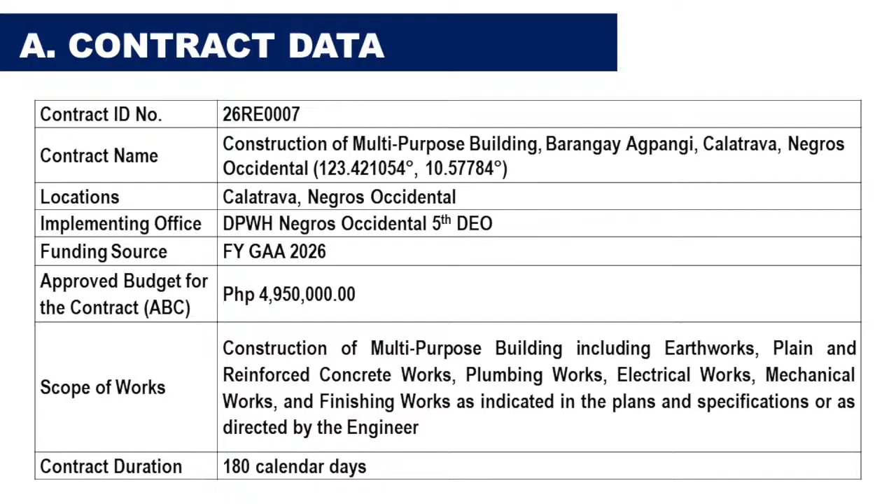For the requirements of our bidding documents, for the major category of works we have BICWO PLC, buildings construction without piles, low-rise concrete frame, 1 to 5 stories. For the similar categories of works: BICW PHCCP, buildings construction with piles, high-rise concrete frame, cast-in-place piles, and BICW PLCCP, buildings construction with piles, low-rise concrete frame, cast-in-place piles.

We also have BICW PHCDP, buildings construction with piles, high-rise concrete frame, driven piles. BICW PLCDP, buildings construction with piles, low-rise concrete frame, driven piles. BICWO PHC, buildings construction without piles, high-rise concrete frame. Then BIL, buildings industrial plant, low-rise. BIH, buildings industrial plant, high-rise. BIM, buildings industrial plant, medium-rise.

For the list of key personnel: 1 personnel each for project manager, project engineer, materials engineer, construction safety officer, and foreman. For the minimum number of years, we have 1 year for the project manager and foreman, and 3 years for the project manager and foreman under total work experience. For project engineer, materials engineer, and construction safety officer, no minimum years of experience is provided, provided that they are accredited project engineer and materials engineer and have completed COSH training or are accredited safety officers.

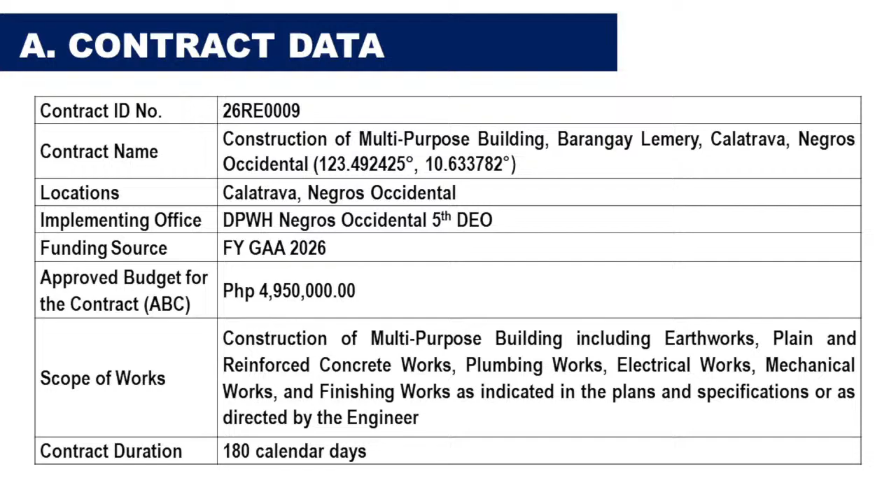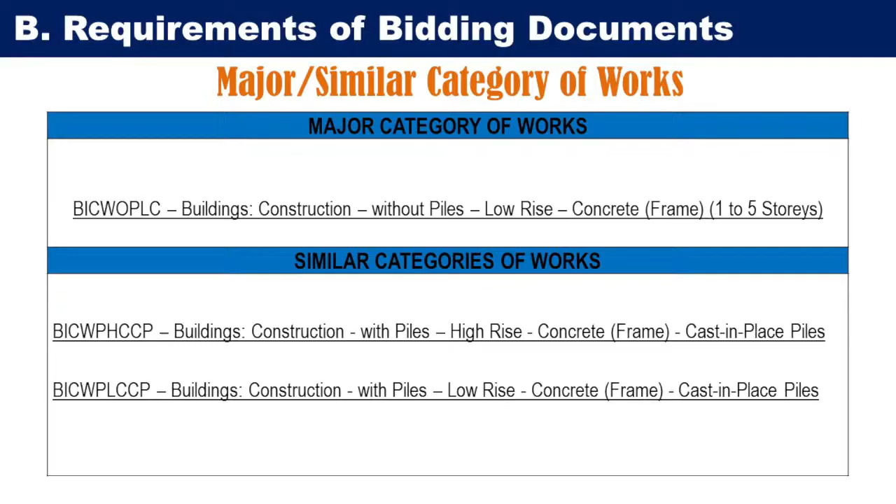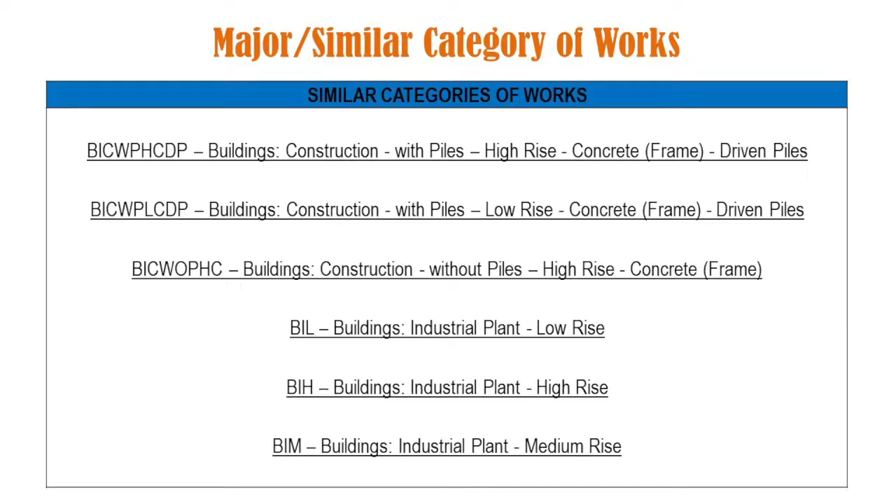For the requirements of bidding documents, major category of works: buildings construction without piles, low-rise concrete frame, 1 to 5 stories. Similar categories of work: buildings construction with piles, high-rise concrete frame, cast in place piles; buildings construction with piles, low-rise concrete frame, cast in place piles; buildings construction with piles, high-rise concrete frame, driven piles; buildings construction with piles, low-rise concrete frame, driven piles; buildings construction without piles, high-rise concrete frame; buildings industrial plant, low-rise; buildings industrial plant, high-rise; buildings industrial plant, medium-rise. For the list of key personnel: project manager, project engineer, materials engineer, construction safety officer, and foreman, the minimum number of personnel is 1.

For the minimum years of similar experience for project manager and foreman is 1, and the total work experience for project manager and foreman is 3. The qualification for project engineer is DPWH accredited project engineer, and for materials engineer, DPWH accredited materials engineer, and for the construction safety officer, with course training.

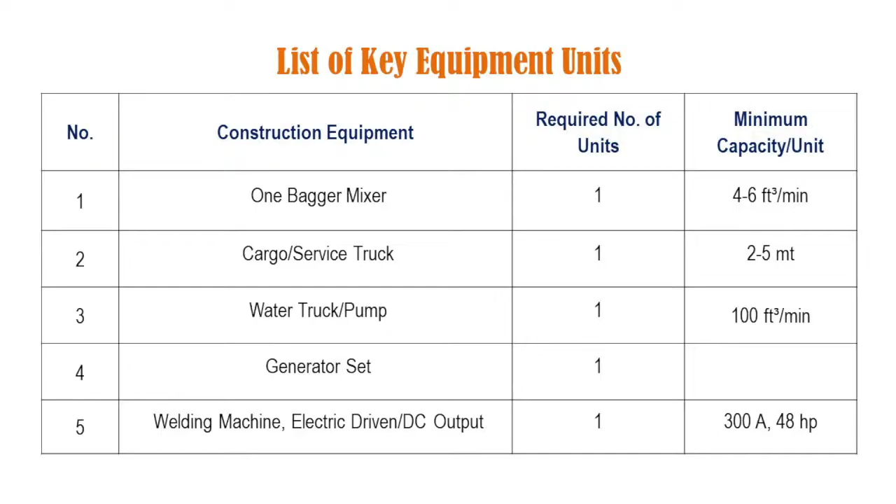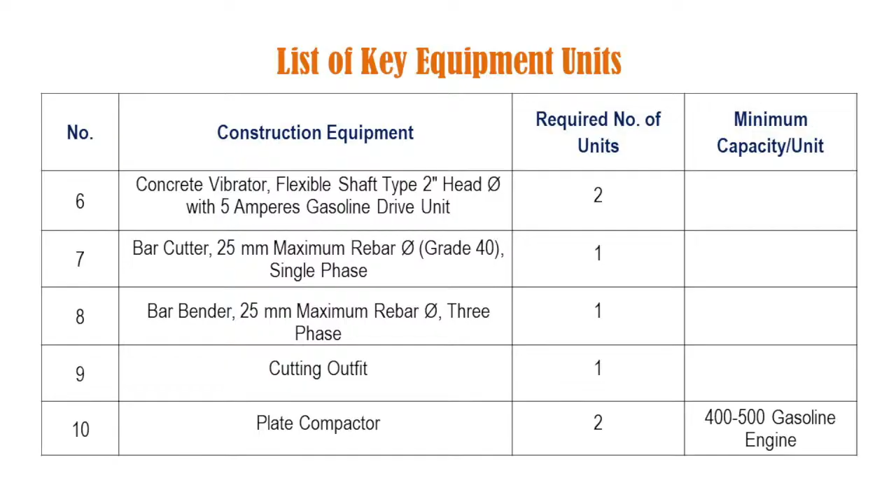For the list of key equipment: bagger mixer 1 unit, cargo service truck 1, water truck pump 1, generator set 1, welding machine electric driven 1, concrete vibrator flexible shaft type 2, bar cutter 1, bar bender 1, cutting outfit 1, plate compactor 2.

For the minimum materials testing equipment for small contractors, please refer to DO 11 series of 2017 for the minimum materials testing equipment, and DO 127 series of 2018 for the strict application of RA 9184 in the conduct of post-qualification of bidders with delayed ongoing contracts with the DPWH.

The required PCAB license for this contract is as follows: license category C and D, and license classification small b.

For contract ID 26RE0010, rehabilitation and major repair of road slope protection structure along Junction National Road Sagay-Bato-Dian-Marcelo Balea Junction Road, kilometer 118 plus 378 to kilometer 118 plus 578. Location is Calatrava, Negros Occidental.

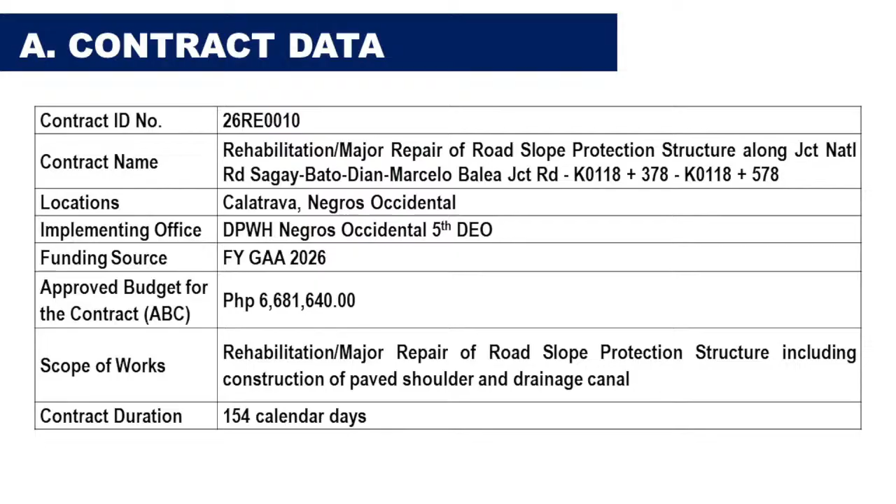Implementing Office, DPWH Negros Occidental 5th DEO. Funding source FY 2026 General Appropriations Act. Approved budget for this contract is 6,681,640. Scope of works: rehabilitation or major repair of road slope protection structure, including construction of paved shoulder and drainage canal. The contract duration is 154 calendar days.

For the major and similar categories of works: roads construction, slope protection using structural measures. For the similar categories of works: flood control construction, slope protection using structural measures; flood control construction, hydraulics, river control.

For the list of key personnel: project manager, project engineer, materials engineer, construction safety officer, and foreman - minimum number of personnel is 1 each. For the minimum years of similar experience for project manager and foreman is 3, and for the total work experience is 5 years.

For the qualifications: the project engineer should be DPWH accredited project engineer, the materials engineer should be DPWH accredited materials engineer, and the construction safety officer should have COSH training.

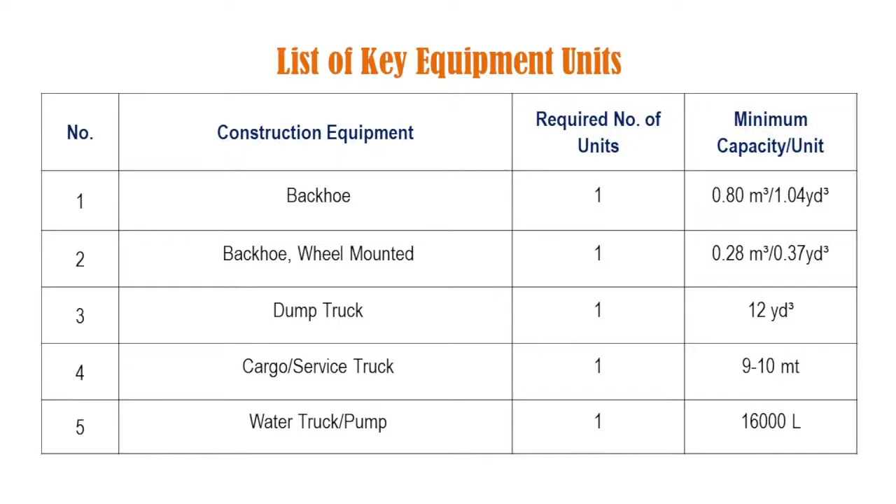For the list of key equipment units: backhoe 1, backhoe wheel mounted 1, dump truck 1, cargo service truck 1, water truck pump 1, plate compactor 1, bagger mixer 1, mechanized joint sealer 1.

For the materials testing equipment for small contractors, please refer to DO 11 series of 2017 for the minimum materials testing equipment, and DO 127 series of 2018 in strict application of RA 9184 in the conduct of post-qualification of bidders with delayed ongoing contracts with the DPWH.

The required PCAB license for this contract: license category C and D, and license classification small b.

For the next contract ID number 26RE0011, contract name: Rehabilitation, Major Repair of Road Slope Protection Structure along Bacolod North Road, kilometer 0096 plus 942 to K0097 plus 042, and then kilometer 0102 plus 796 to kilometer 0102 plus 814, located in Escalante, Negros Occidental.

Implementing office is DPWH Negros Occidental 5th District Engineering Office. The funding source is FY-GAA 2026. The approved budget for the contract is 4,900,000.

The scope of works is rehabilitation or major repair of road slope protection structure using stone masonry with concrete sheet pile foundation on the right side, including lined canal on the left side, and paving of shoulder on both sides. Contract duration is 120 calendar days.

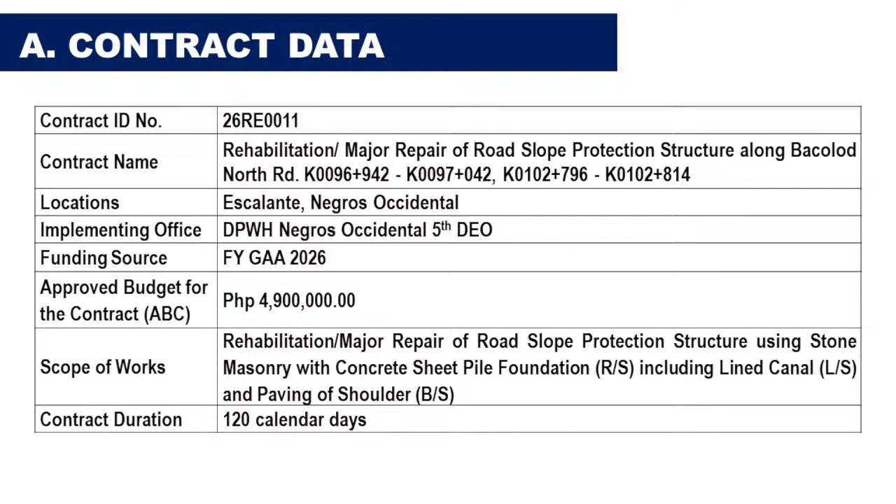For the major and similar category of works: RCSPS - roads construction, slope protection using structural measures. Similar categories of works: flood control, construction, slope protection using structural measures, and flood control, construction, hydraulics, river control.

For our key personnel: project manager, project engineer, materials engineer, safety officer, and foreman, one for each personnel. Minimum years of similar experience: one for the project manager and foreman, and 3 for their total years of experience.

Then the qualification: the project engineer and materials engineer should be accredited field engineer from the DPWH, and the safety officer should have attended COSH training.

For our key equipment units: transit mixer, water truck, 1 bagger mixer, motorized road grader, and vibratory roller, 1 for each equipment.

You also have backhoe, joint sealer machine, dump truck, cargo truck, and payloader, 1 for each equipment. Crawler crane, jackhammer, drop hammer, plate compactor, concrete spreader, concrete vibrator, also 1 for each equipment.

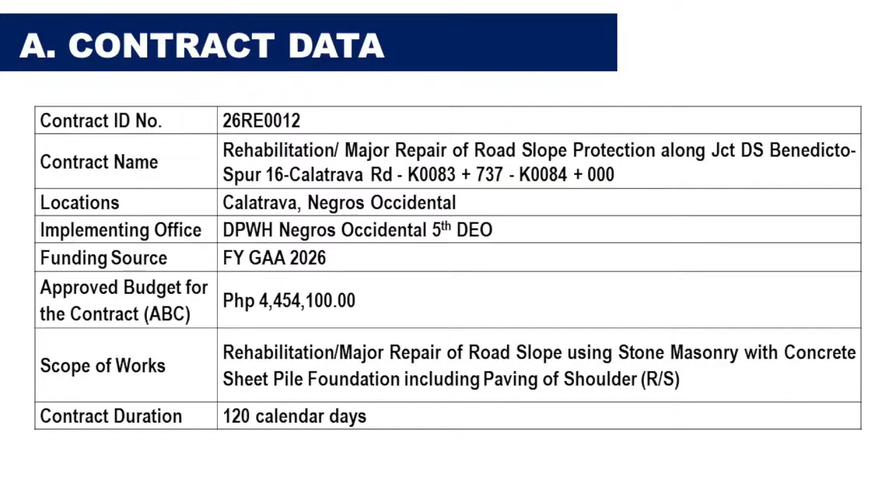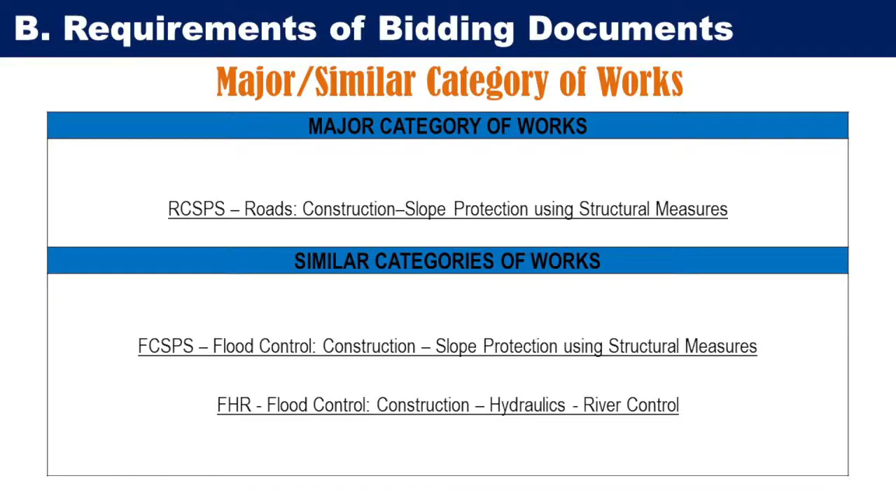For our major and similar category of works: roads construction, slope protection using structural measures, and flood control, construction, slope protection using structural measures, flood control, construction, hydraulics, river control.

And for our key personnel, again, 1 for project manager, project engineer, materials engineer, construction safety officer, and foreman. Minimum number of years is 1 for the project manager and foreman, and 3 for their total minimum work experience. For the project engineer and materials engineer, should be an accredited DPWH field engineer. For the construction safety officer, should have attended the COSH training.

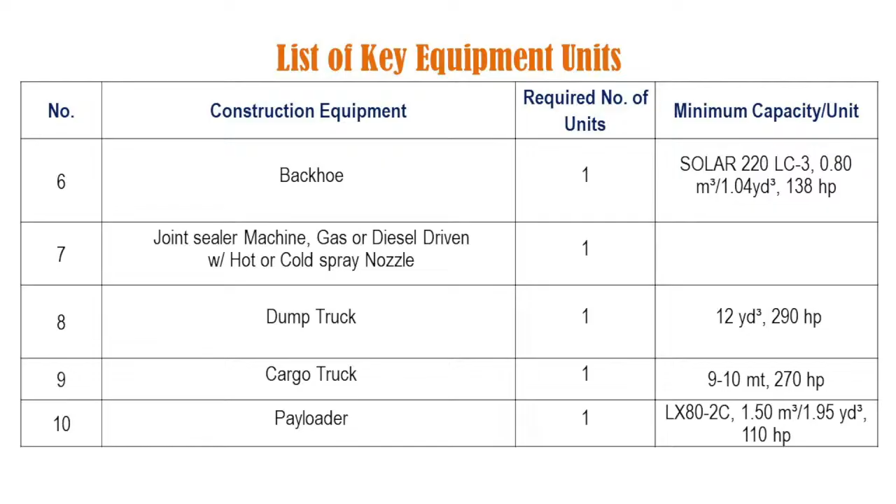So the list of key equipment units: 1 for transit mixer, water truck, 1 bagger mixer, motorized road grader, and vibratory roller. Also 1 for backhoe, joint sealer machine, dump truck, cargo truck, payloader, and 1 for crawler crane, jackhammer, drop hammer, plate compactor, concrete spreader, and concrete vibrator.

Again, for our material testing equipment, kindly refer to DO 11 series of 2017 and also the requirements of DO 127 series of 2018. For the PCAB license requirement, license category is C and D, and license classification small b.

For our last contract, ID 26RE0013. Contract name: installation, application of road safety facilities, roadway lighting along Bacolod North Road, kilometer 0137 plus 661 to kilometer 0138 plus 471. Location is Calatrava, Negros Occidental.

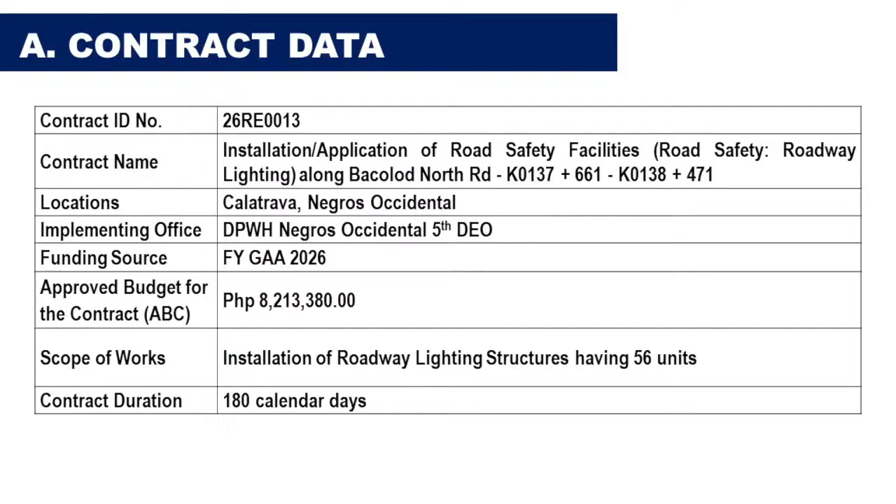Implementing Office, DPWH Negros Occidental 5th DEO. Funding source is FY GAA 2026. The approved budget for the contract is 8,213,380 pesos. Scope of works: installation of roadway lighting structures having 56 units, and contract duration is 180 calendar days.

Major similar category of works: TMS, Traffic Engineering and Management System, and for similar categories of works: Traffic Engineering Guardrails, Traffic Engineering Pavement Markings, Traffic Engineering Profile Markings. Also for similar categories of works: TEPS, Traffic Engineering Pavement Studs, TES, Traffic Engineering Signalization, TEA, Traffic Engineering Signage.

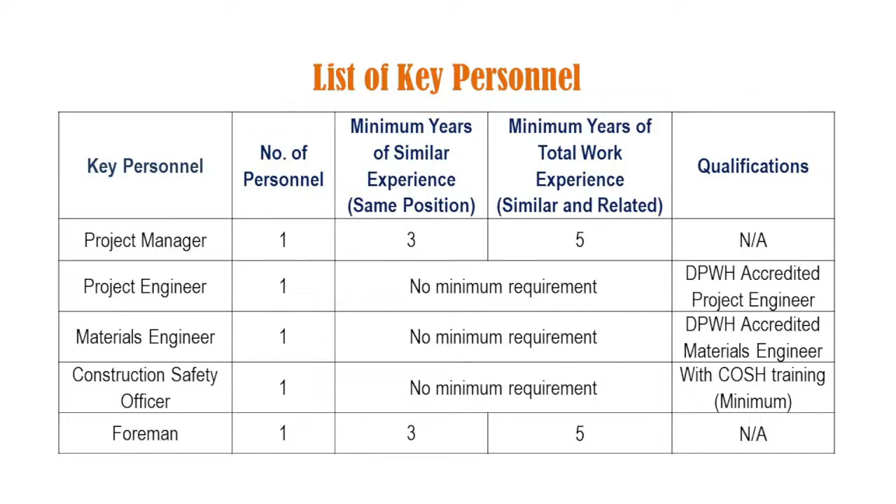For the minimum personnel, 1 for the project manager, project engineer, materials engineer, safety officer, and foreman. The minimum years of similar experience is 3 for project manager and foreman, and 5 years for their total experience. Qualification is accredited project engineer and materials engineer, and attended COSH training for the safety officer.

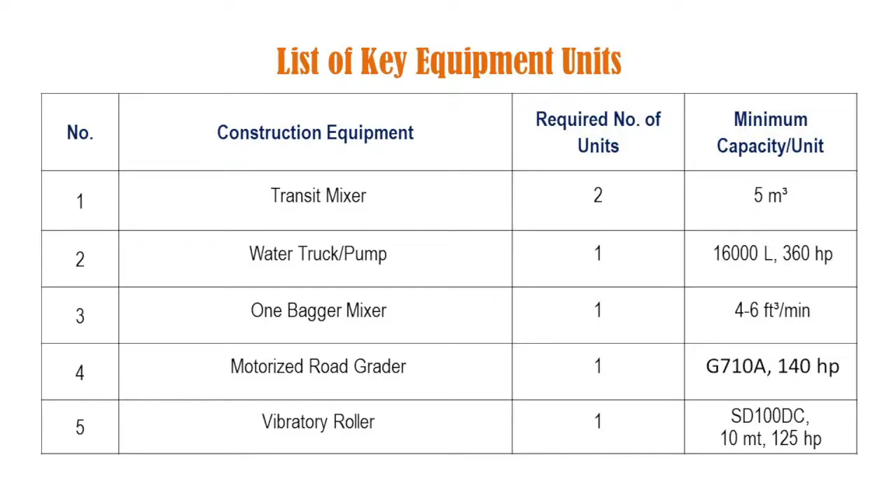So these are the list of the key equipment units: 2 units for transit mixer, 1 unit for the water truck, 1 bagger mixer, motorized road grader, vibratory roller. Next, backhoe, mechanized joint sealer, dump truck, concrete spreader, concrete vibrator, 2 units. Crawler crane, jackhammer, drop hammer, plate compactor, concrete spreader 1, concrete vibrator 1.

Kindly refer to D.O. 11 series of 2017 for the material testing equipment and D.O. 127 series of 2018 for the strict application of RA 9184. Again, for the required PCAB license is license category C and D, and then license classification is small b.

So the schedules: the deadline for the submission of clarification is April 1, 2026. Deadline for the submission of bids, April 8, 2026. Please submit 1 original copy for technical and financial envelope of its bid. The place of submission is Conference Room, DPWH Negros Occidental, 5th DEO, San Carlos City, Negros Occidental.

Pursuant to the Memorandum Circular Number 114 Series of 2026 issued by the Office of the President, implementing a 4-day on-site work arrangement, on-site inquiries and inspection of bidding documents on Fridays may not be feasible. So all interested bidders may instead coordinate with the Bids Secretariat through the contact number indicated in the invitation to bid.

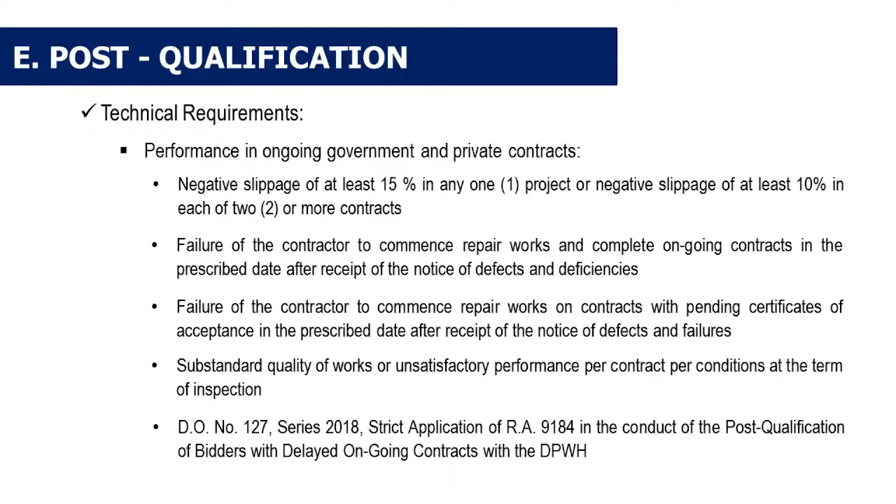D.O. number 127, series of 2018, requires strict application of RA 9184 in the conduct of post-qualification of bidders with delayed ongoing contracts with DPWH. This includes authenticity and correctness of bid security, financial requirements, bid price proposal, and NFCC.

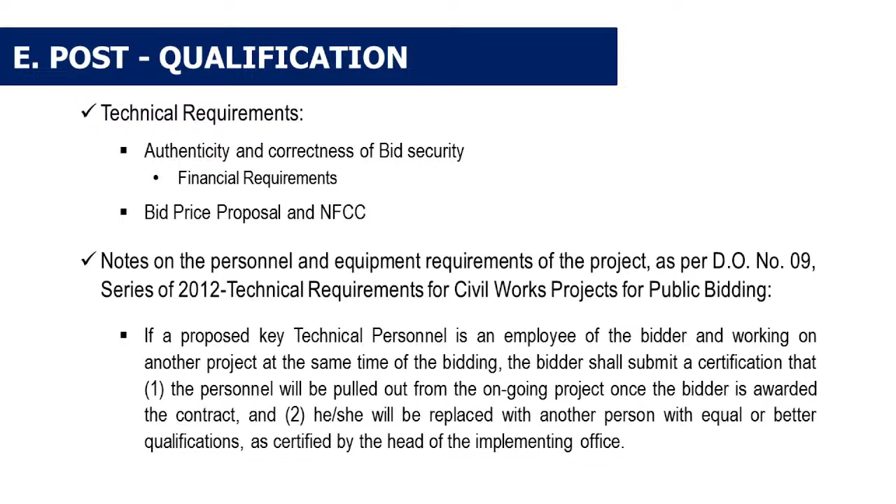Here are the notes on the personnel and equipment requirements of the project as per D.O. number 9, series of 2012, on technical requirements for civil works projects for public bidding. If a proposed key technical personnel is an employee of the bidder and working on another project at the same time of the bidding, the bidder shall submit a certification that: 1, the personnel will be pulled out from the ongoing project once the bidder is awarded the contract, and 2, he or she will be replaced with another person with equal or better qualifications as certified by the head of the implementing office.

Also, the bidder may propose a key technical personnel who is not its employee, provided that the said personnel is required to submit a certification that he or she will work for the bidder if it is awarded the contract under bidding. These certifications shall be included in the first envelope of the sealed bid.

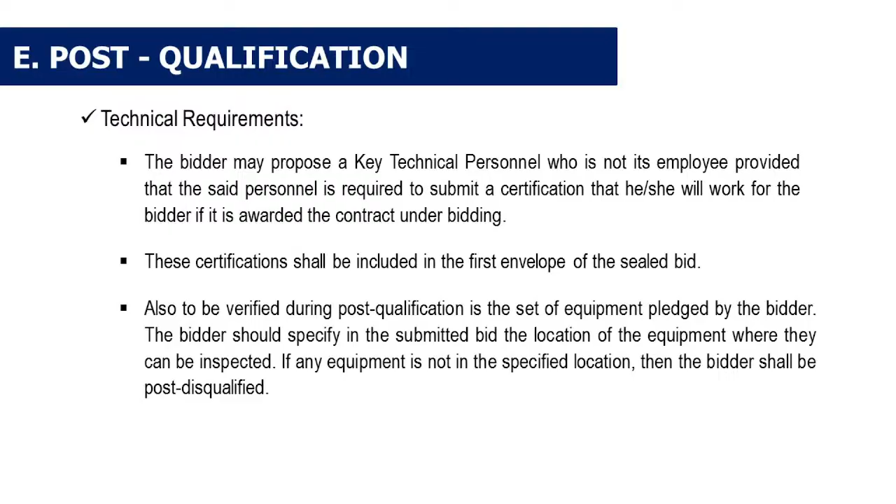Also to be verified during post-qualification is the set of equipment pledged by the bidder. The bidder should specify in the submitted bid the location of the equipment where they can be inspected, and if any equipment is not in the specified location, then the bidder shall be post-disqualified.

For the contract award, the contract shall be awarded to the bidder whose bid has been determined to be the lowest calculated and responsive bid as a result of the detailed evaluation and post-qualification conducted. Contract award should be made within the bid validity period. Subcontracting is not allowed.